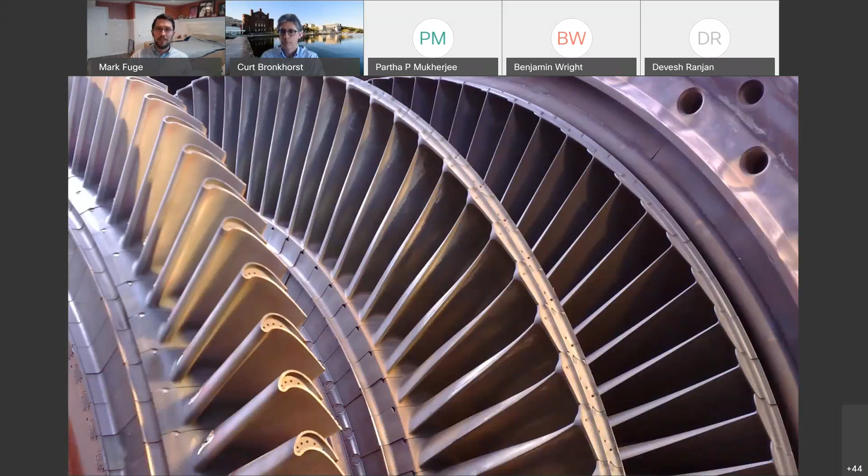I really like turbine blades because I think they represent, in such a small piece of equipment, so many of the complexities we see across mechanical engineering, from pushing the boundaries of material science to vibrations to manufacturing to aerodynamics. They're really a wonderful example.

I'm going to take an even simpler example than this, just the 2D cross-section and just the aerodynamic portion of it. But I'm hoping that from this simple example you won't focus so much on the specific application, but rather on the broader implications these ideas of learned representations would have for your field. Whether you work in turbine design or robotics or medical devices, the things we're going to talk about apply to all of those cases.

Specifically, here's how I want to spend the next 15 minutes or so. First, what are these ideas of design manifolds? That's specific to the work I do, but it's about data-driven learned mathematical representations. Why are they useful? Why go to the trouble of learning the skills necessary to study these things? And then, where do you go from here? If I do convince you these are important tools to add to your toolbox, what could you do?

So when I talk about a design manifold, what do I mean? Let's go back to that simple turbine blade example, even simpler than the full 3D one with all its complexities. Let's just look at a 2D cross-section, something that might look like this airfoil. I think an important question we often take for granted is, well, what actually is an airfoil and how do I represent it?

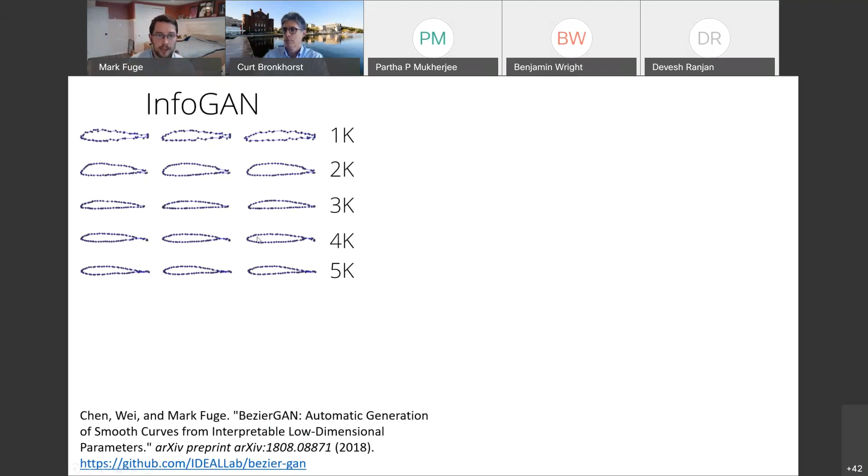In our case, what we did was take this standard model and the only modification we made was to add a small Bezier layer — just another layer in one of these neural networks. I won't go into the specific details due to time, but it captures things like curvature continuity and curvature control, which matter to people who study aerodynamic shapes.

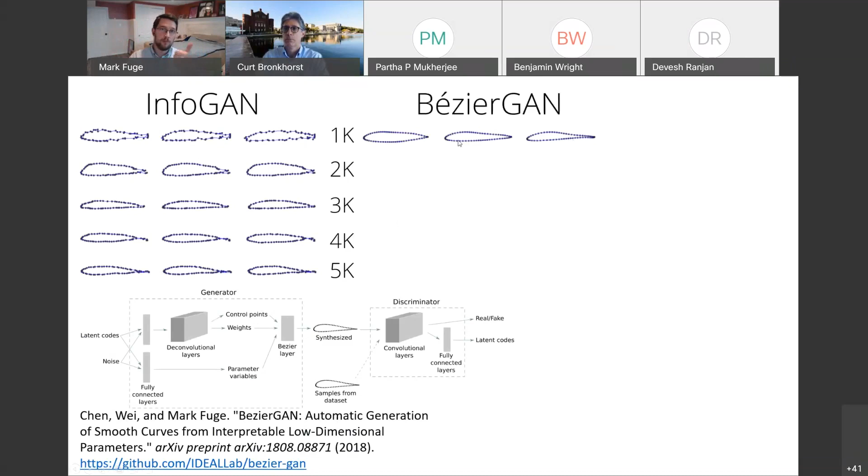By marrying our geometric knowledge of the engineering domain with these data science techniques, we can generate valid, curvature-continuous shapes, and also learn using far fewer training cycles than the associated computer vision system. So combining these two means taking examples of your engineering domain knowledge and applying them with the best of what computer science has to offer to find a happy medium. I think there's a lot of low-hanging fruit here for those of you in other mechanical science domains.

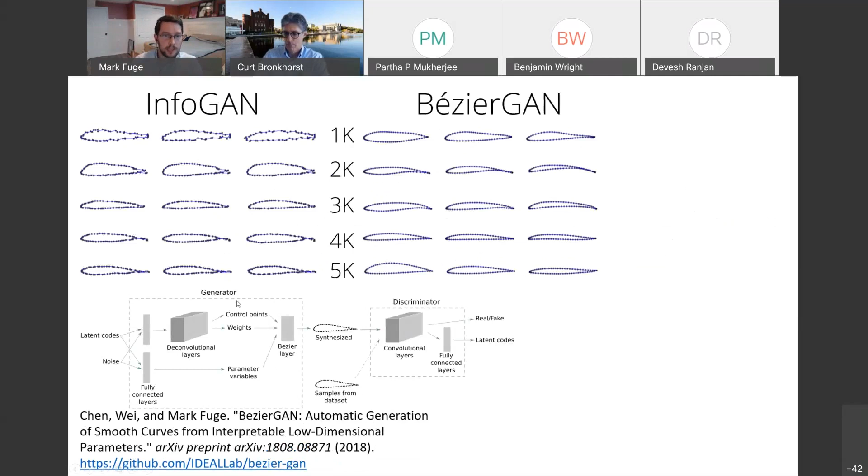Another example is multi-part components. One tricky thing about engineering systems is that it's not just a single image — there might be multiple shapes that need to intersect together. For example, in this simplified 2D case, I might have a shape and two conduits that need to pass through each other, with part dependencies depending on how they're manufactured or assembled. It turns out your engineering knowledge of the overall system architecture — how geometric parts should go together — can create a strong inductive bias for these machine learning models.

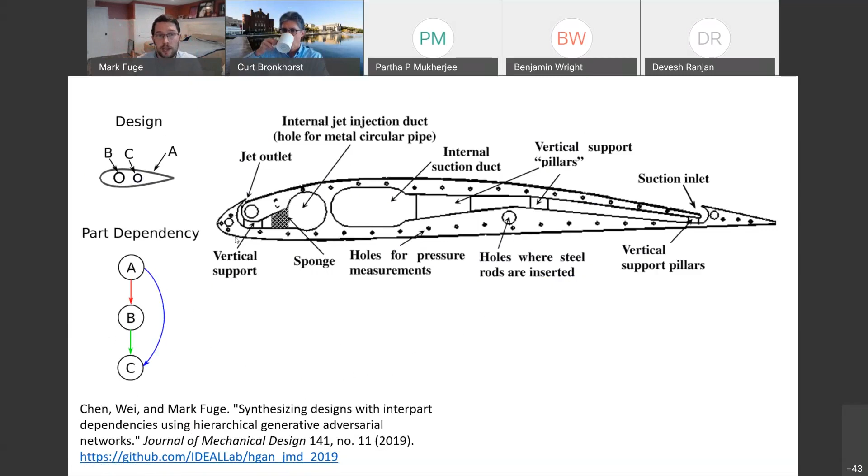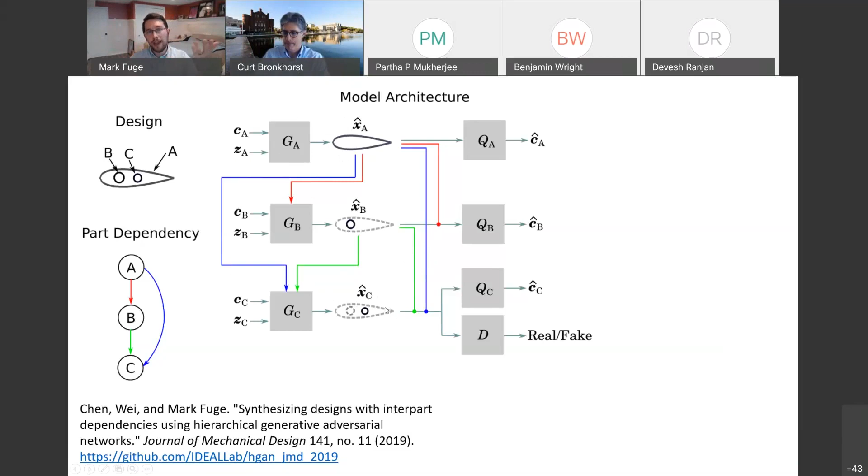In this particular case, we create separate learned representations for both the outer airfoil and all the internal components, wiring the neural architectures together and training them concurrently with some specific tricks we developed in the paper. The high-level result is that rather than treating this as a giant image to generate, you can learn conditional dependencies that model things like part containment.

For example, the algorithm learns a representation in which interior parts are always inside the exterior parts, even though we never explicitly told it that geometric containment was the goal. You'll also notice there's a topological hole in the space — because we didn't encode the topology correctly in this last layer, the model isn't able to capture this fact. So there's clearly additional work you can do if you know things about the topology of spaces that standard methods can't capture.

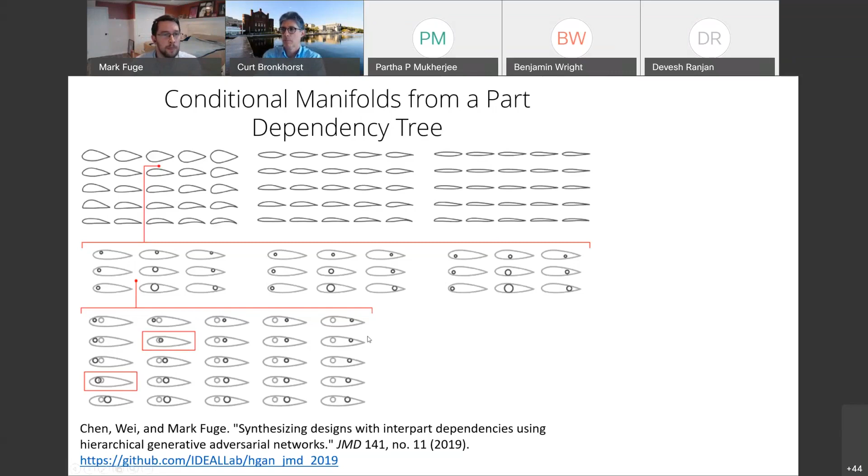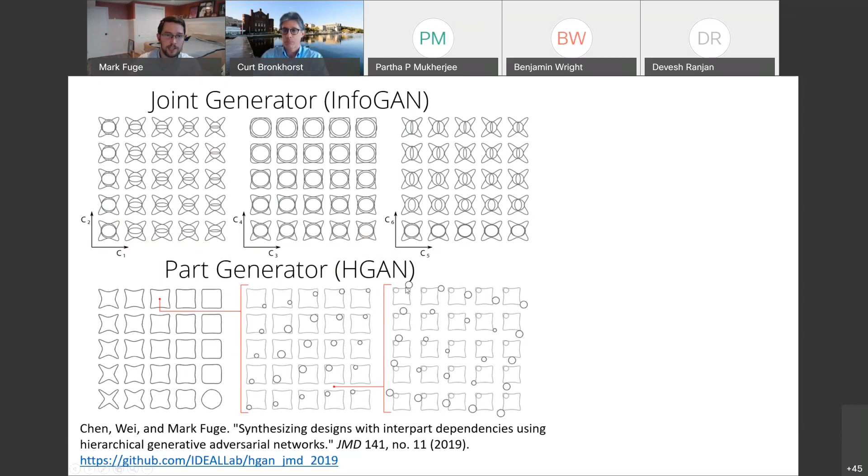However, if we model these in a hierarchical structure — in this case with parts that were internally tangent and externally tangent to the shape — it actually learns, without us telling it, that a polar coordinates representation is reasonable for parts with internal tangent constraints. Again, not something we told it explicitly. All we told it was that there's some kind of hierarchical relationship, and it uncovers that polar coordinates is a reasonable representation even though we never mentioned tangent constraints. So it's quite powerful to take fairly simple inductive biases from your engineering domain knowledge and encode them as modifications that would otherwise fail if used out of the box.

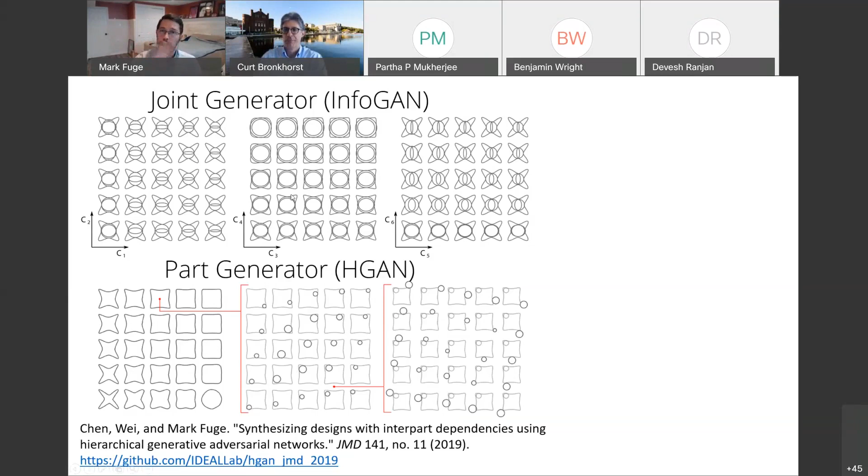So that's what design manifolds are. Why are they useful? Well, randomly sampling in this case, this Bézier GAN, but a learned representation space just makes sense. That's the technical term I'm going to use here.

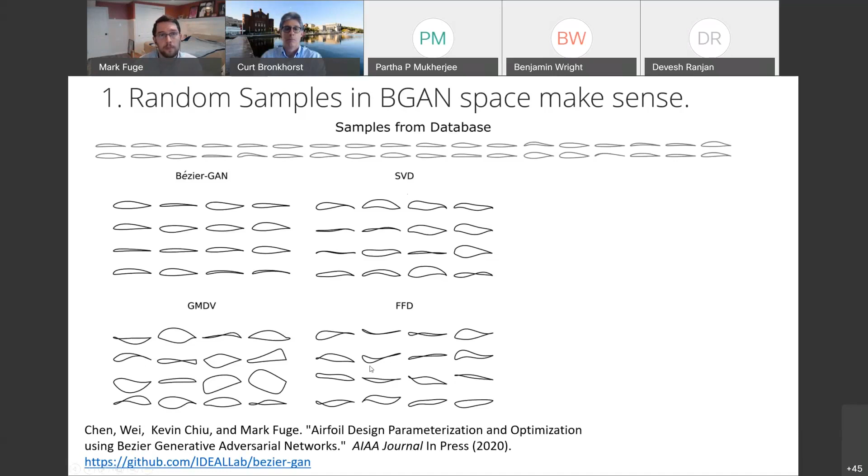It also covers the data distribution better. This is not surprising since it's specifically optimized to do this. But what's interesting about this is that when you do take random samples in human design coordinates like FFD or modal variables, it'll often produce degenerate shapes that won't even solve.

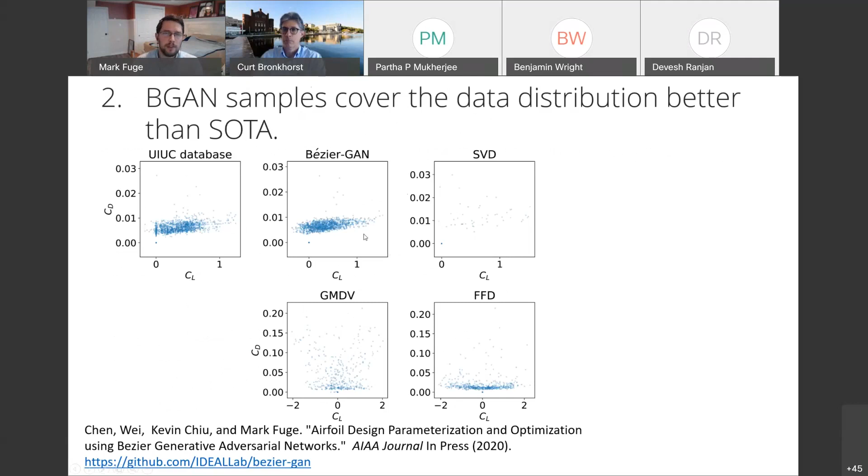And in this particular case, we're looking at generating samples of different lift and drag. So it covers those samples much better. But those are mostly just parlor tricks. The real benefit to this is when you try and use it for optimization.

So what I'm going to show you now is on the x-axis is basically number of CFD runs. This could be a week long if you're doing a really, really expensive large eddy simulation. And this is trying to find the optimal lift-over-drag for a given Mach number or Reynolds number.

And if you look at this using traditional representations—you boot up your CAD system right now and try and design one of these things—you see curves that look kind of like this. If it's a NURBS, which is a B-spline, depending on which optimizer algorithm you use, you get this kind of performance.

And if you just use something like principal component analysis, which is again this linear subspace, what you can see is that initially it makes faster progress because the number of dimensions it has to optimize is much smaller, and then eventually plateaus because all of the good airfoils that you actually want are off manifold—they're off this linear subspace. So this is kind of the classic phenomenon you'd expect as you start to decrease dimensions.

Once you go nonlinear, however, you can get the same kind of cost reductions in terms of optimization that you would get from a reduced dimension, but still faithfully capture these higher-performing airfoils. So in this case, we're able to achieve about a 10x reduction in the amount of CFD runs you have to do to get basically equivalent performance no matter where you go.

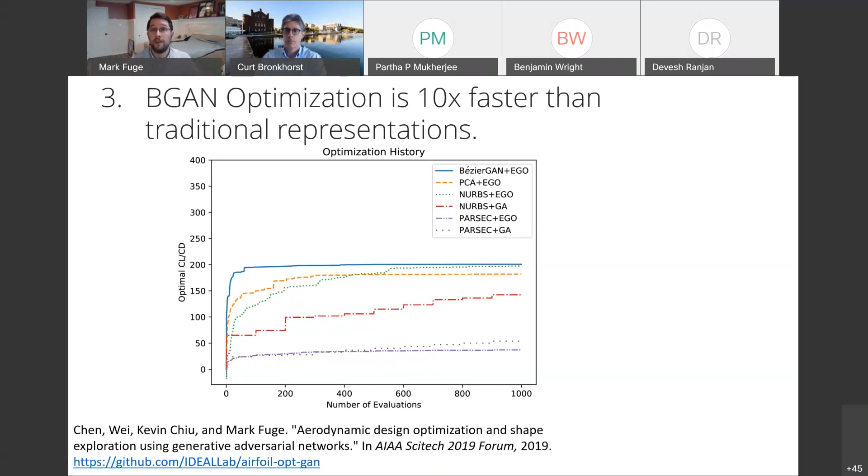So this is the sort of punchline for why learned representations are good. They make downstream tasks like uncertainty quantification or optimization much faster. We see the same thing even with state-of-the-art representations.

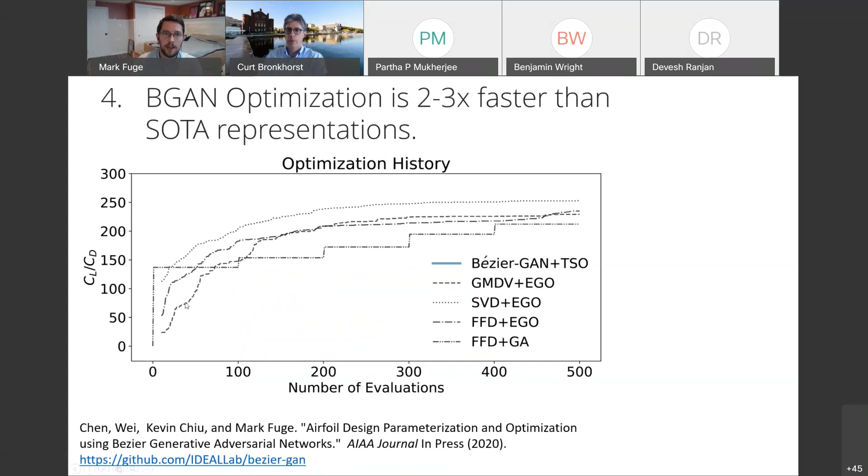So not stuff from 20 years ago, stuff that was published in the past 2 years—you still see, for freeform deformation, modal variables, SVD, which is a type of principal component analysis, accelerating the optimization, and then again with these nonlinear dimension reductions, achieving even faster performance than those, about 2 to 3x. So this is really the key punchline for why you would care about things like learned representations.

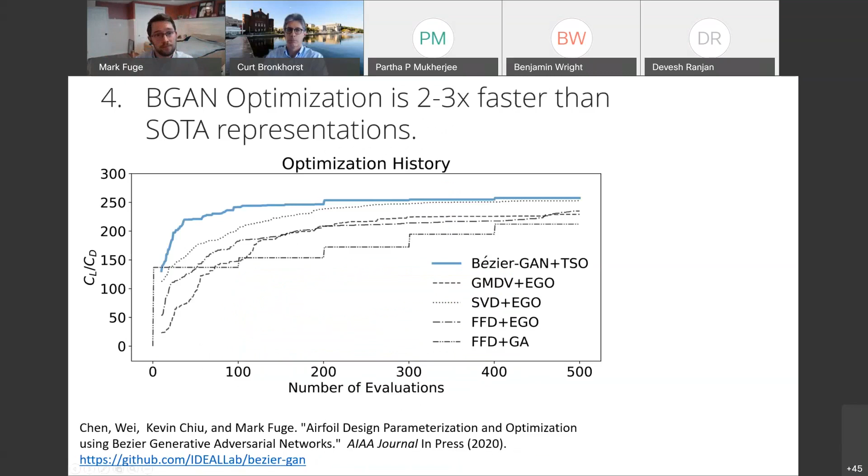Okay, so if I've convinced you that these things are interesting, where can you go from here? One of the questions I always get when we talk about data-driven representations is, well, what actual data do I need and how much of it do I need?

And what's interesting about the work that I showed you here is that we didn't learn these data-driven manifolds from airfoils that were specifically optimized or in any way targeted for the specific Mach number or Reynolds number we were optimizing for. We just used reasonable examples that prior engineers had thought of for different kinds of boundary conditions. But it turns out even those designs that were not optimized for that case still provided a reasonable learned representation that outperformed current state-of-the-art representations like freeform deformation or modal variables.

This should not be possible, or at least it didn't make sense to me the first time we saw it. But really, as long as you have some subset of designs that reasonably captures major variations in the space, these learned representations can still be useful. Likewise, if you do have any invariants that you can use to augment it, like we did here with the geometric constraints, those can help.

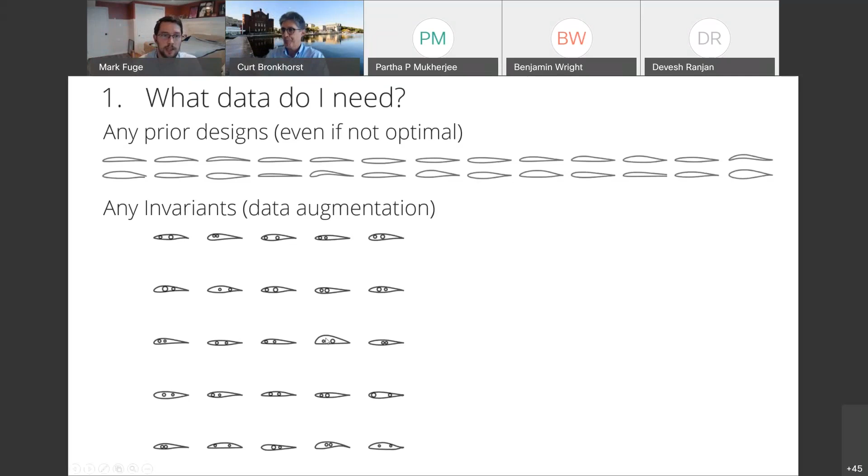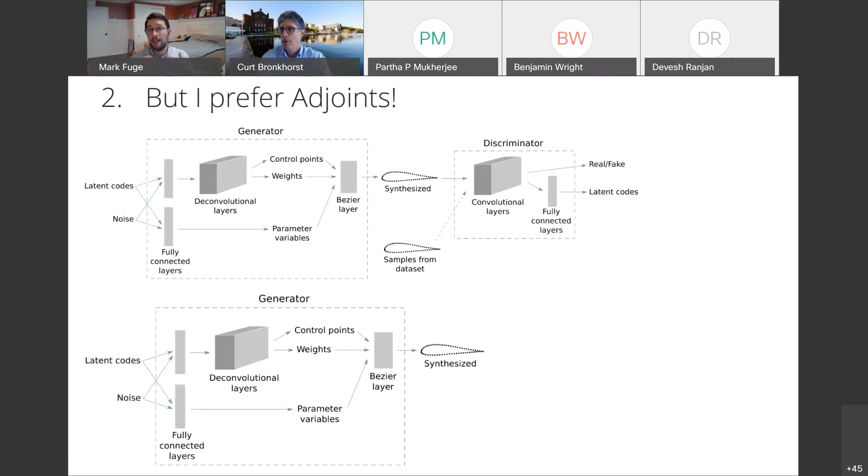If you are the type of person who doesn't necessarily want to do airfoil synthesis, but you care about things like uncertainty quantification or doing gradient-based optimization using adjoints, you can actually cut and paste various portions of these. For example, the generator we use to generate these airfoils is fully differentiable, so it's completely compatible with any kind of uncertainty quantification or adjoint optimization approaches. You don't necessarily have to pick and choose your approaches.

What if innovative examples actually come off the manifold? In other words, they're actually off the subspaces that we learned. Well, it turns out that these are still reasonably good ideas. Learning this manifold is still a reasonably good idea in two ways.

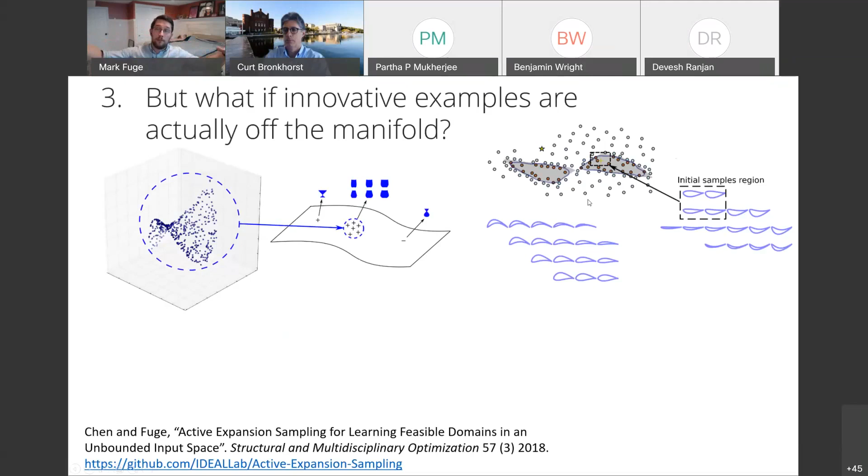The first is that you can use this as a base to explore what I would call across the manifold. So there might be a set of designs that you can use to explore outward and find other designs. In this particular case, we started with a small set of samples and invented an algorithm that explores around on the manifold to find new and novel designs that you hadn't thought of before. We had to invent this idea called active expansion sampling to do that, which I'm not going to go into, but if you're interested, you could take a look at our paper on this.

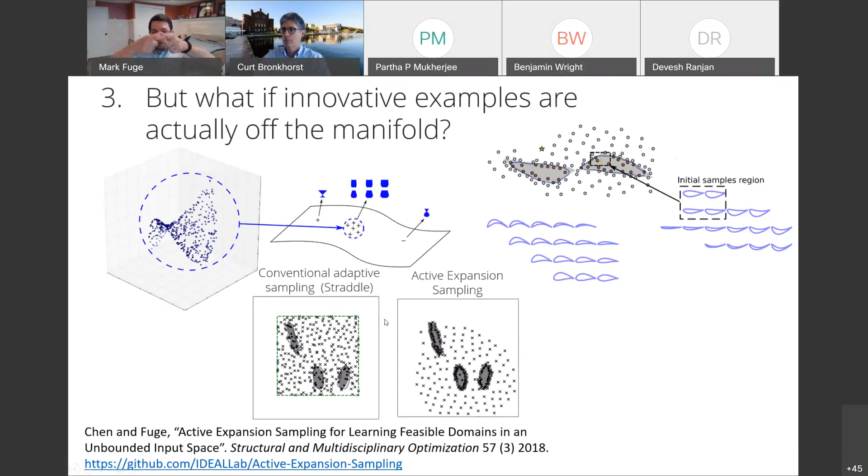In addition to exploring across the manifold, you can also explore off manifold. In this particular case, we can optimize an airfoil until we've achieved the best possible performance, and then go back to the 100-dimensional representation where those minor variations around something that's locally optimal in the manifold could still improve performance. So it's even a good way of warm starting techniques that have nothing to do with finding these low-dimensional learned representations. It can still accelerate that quite significantly.

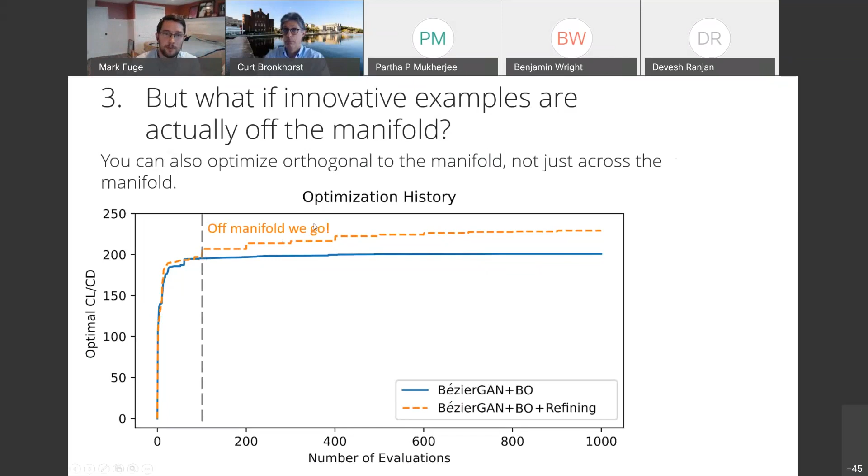Okay, so off manifold we go, and then you can go and do regular kinds of optimization from there that don't include any of this data-driven manifold work.

When shouldn't you use this? Well, if you don't have any reasonable prior designs, like you've never worked in a domain before, then there's not really going to be any prior basis to learn these. So that's not a place where doing any kind of data-driven modeling would make sense, including the work I'm talking about here. Likewise, if you can't bootstrap this with simulation, for example, trying a bunch of simulated designs and then down selecting to a subset that work, or known invariants, then this also wouldn't work. In those two situations, I would recommend doing something like active subspaces, where you can compute things like gradients. So how could you get started?

Well, if you'd like, you can go to our GitHub. All of the examples I've shown here and many others from other papers are available for you to try on your own data, as well as the papers that we have published.

But I want to return to my overall point that I wanted you to take from today, which is that how you represent whatever phenomenon it is you're studying matters. In my case, it might be airfoil optimization. For other people, it might be uncertainty quantification of a material system. And the way that you mathematically represent that is a non-trivial choice. It could have drastic consequences on how quickly you could do things like optimization, or even if you can do something like uncertainty quantification for your system.

What I've tried to convince you of today is that in addition to thinking through things like group theory or other types of symmetries in the physics and mathematics of the problem, there's advantages to be gained by thinking through how to leverage past data to help infer better representations. And I've tried to convince you that this is possible, that it's powerful. It can achieve, in this case, about a 10x reduction compared to current representations, or a 3x reduction compared to existing state-of-the-art.

And also that they're a necessary component if you're going to be able to educate researchers in how to combine the best of what computer science and machine learning and the data sciences have to offer with the best that we have to offer. And so my take-home message, if your goal is to tackle these pressing important societal problems like efficiency and climate change.

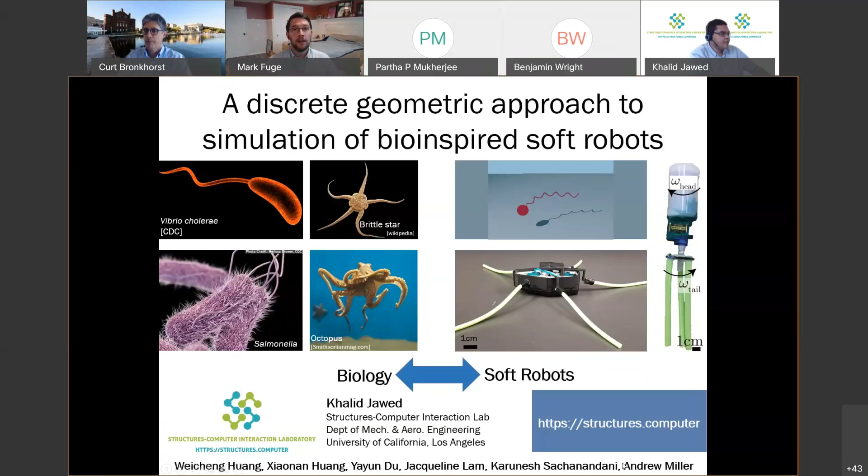So let's begin. Today, I will first go over fast physics-based simulation tools that are inspired by computer graphics, tools that can run at interactive rates. And then I will use these simulation tools to learn about the application of deformation and instability in the design of bioinspired robots, as well as the physics of the organisms.

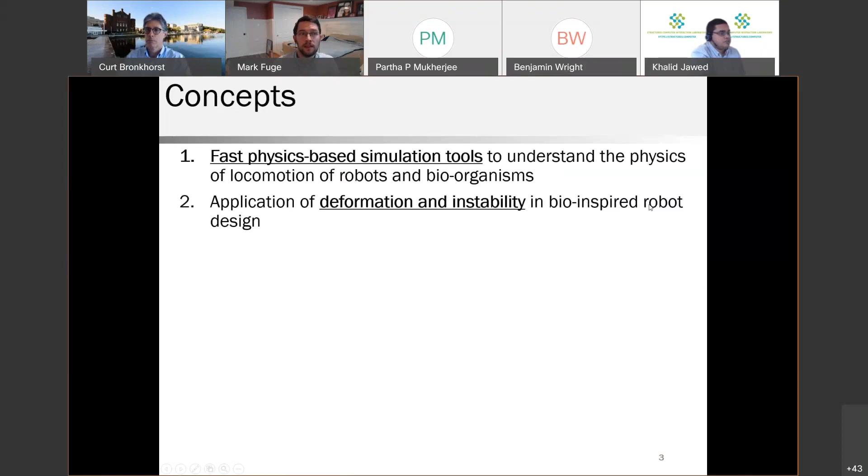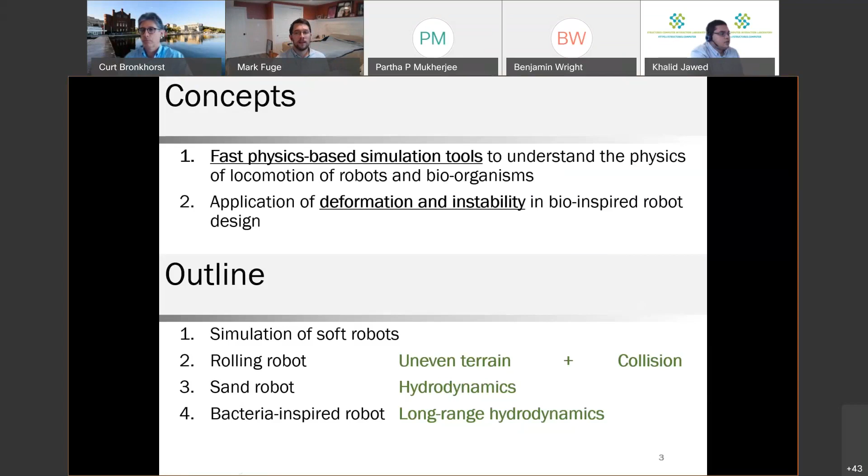So first, I will begin with simulation techniques for soft robots. Then I will go over an example with a rolling robot, where we will encounter challenges such as uneven terrain and collision. Then very briefly, I will use the same simulation tool to study two more robots, both of which will include fluid structure interaction. So at the end of the day, I hope that I will have introduced a simulation tool that can simulate large deformation of soft robots and incorporate things like hydrodynamics, collision, and so on.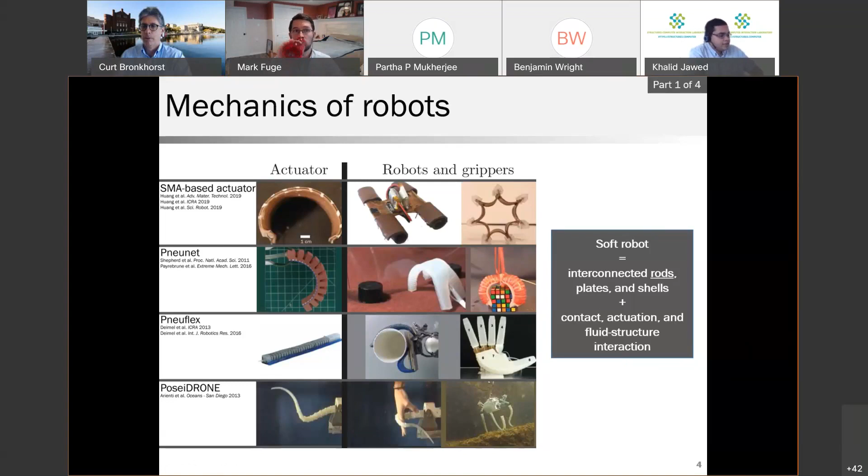An overwhelming majority of soft robots can be modeled as a collection of rods, plates, and shells. You can have rigid bodies as well. This whole system will encounter things like contact, actuation, and fluid structure interaction. So the framework I will present today is not applicable to every single robot out there. However, for robots that are slender, that look like a plate, shell, or rod, I hope the simulation tool will be useful.

Let's start from the fundamentals. Let's think of a mass spring system. If I want to simulate a mass spring system in an undergraduate dynamics class, all I have to do is solve this equation that F equals ma. So mass times acceleration is equal to elastic force and the external force.

The elastic force can be obtained from the negative gradient of the elastic energy. In case of a spring, I'm calling this elastic energy, or I could have called it spring energy as well. It's simply 1/2 kx squared.

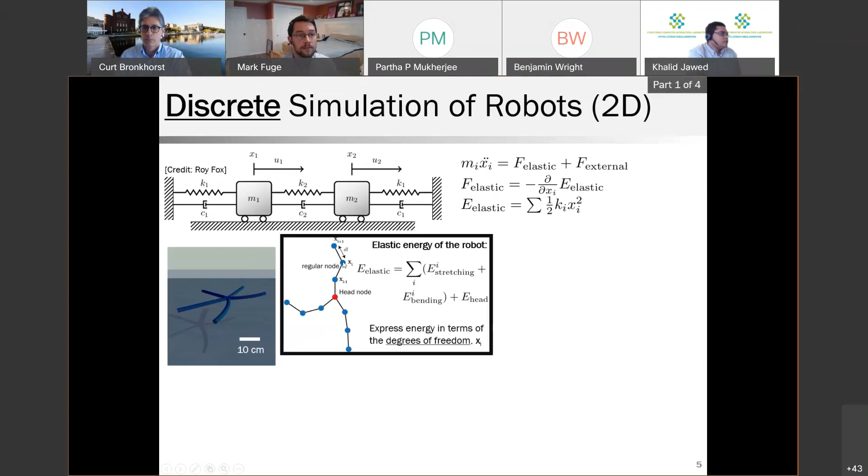Now I can use a similar approach, a mass spring based representation, to simulate a robot that looks like an octopus. Let's say this is a representation of the robot. Then the total energy is the sum of stretching and bending energy plus some energy at the head. Stretching energy is just like a spring between two nodes.

I'm not going into the mathematical details of this. The bending energy is related to the turning angle at a node. So if I have 3 nodes here, there is a turning angle. I can calculate curvature binormal from this turn, and then the bending energy is simply 1/2 EI, where EI is the moment of inertia times Young's modulus. So this whole thing is bending modulus times curvature squared.

Now at the head, we have to do a special treatment. The energy at the head is simply the sum of 3 bending energies, since I have 3 angles at the head. So the head energy is equal to the sum of 3 discrete bending energies.

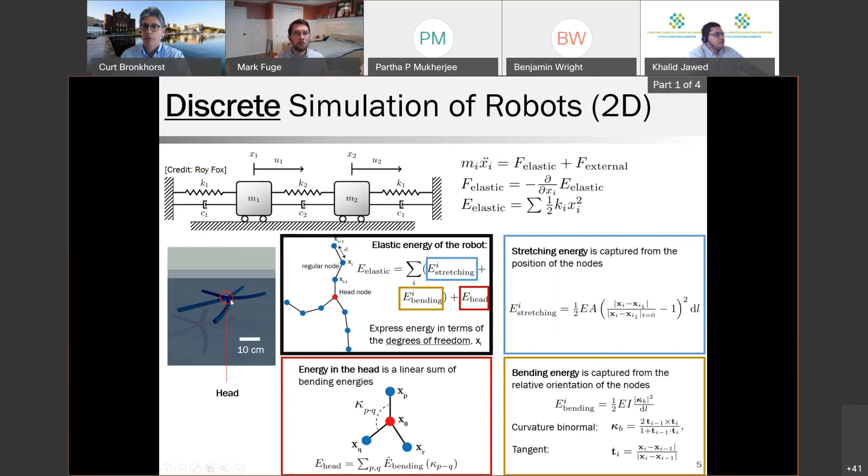Once I have all the energies, I can simply solve an equation like this in 2 dimensions. This was an example in 1 dimension, then an example in 2 dimensions. Now let's move on to 3 dimensions. Instead of calling it a beam, we are going to call it a rod.

For this, we go back to Kirchhoff, who represented the energy as a sum of stretching, bending, and twisting energy. So the main difference between a beam and a rod is this existence of twisting.

We will be building up on a simulation tool called discrete elastic rods. This simulation tool has been used by the computer graphics community since 2008. It has been used in movies like The Hobbit, Lord of the Rings, and so on. It was also imported to study various systems like coiling of rods, bacteria, CNTs, and so on in mechanical engineering.

Generally speaking, oftentimes in computer graphics, physical accuracy is neglected. However, in engineering, we cannot really neglect physical accuracy. We have to match experiments and simulations. So in this case, we are careful enough and have analyzed it enough to make sure that this actually represents the physical systems. Some of these papers will include comparison with experiments as well.

In case of a 3D rod, instead of just the nodes, I will also need the twist. To measure the twist, I can use the angle between a reference frame, which is the white and black frame here, and the material frame, which is the blue and red frame here. But in discrete settings, instead of using the continuous rod, I will use a discrete rod and formulate a twisting energy at each node by an expression that looks like this.

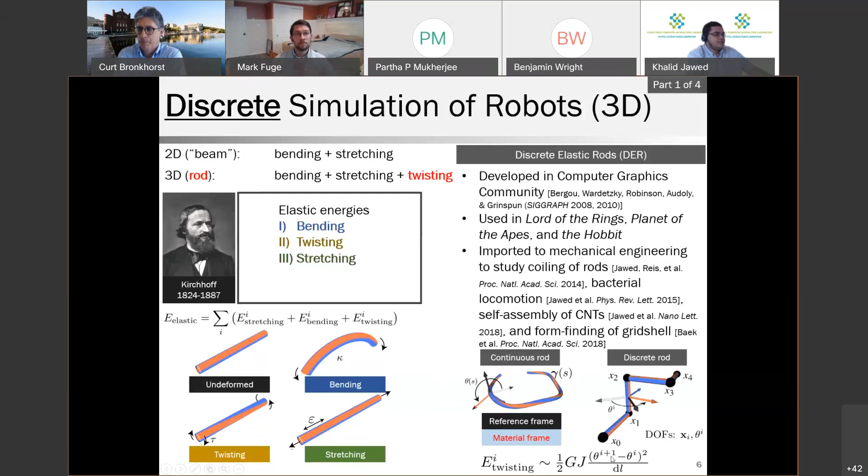So twisting energy is proportional to GJ, which is the twisting stiffness. G is the shear modulus and J is the polar moment of inertia, times the difference between twist angles squared. So this is essentially like a spring, a torsional spring.

Generally speaking, when we convert a system into a mass spring system, we oversimplify the problem. But this is where discrete differential geometry comes in: it's a method of describing a continuous system through its discrete analog without oversimplification.

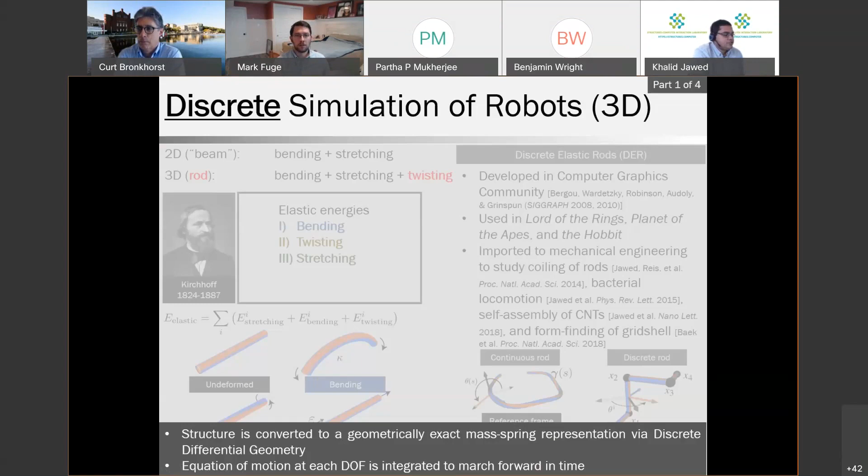Sometimes it is called the geometrically exact mass spring representation. So once I have the energy, I can use a spring-damper-like equation of motion to go forward in time step. Let's elaborate on that through an actual robot.

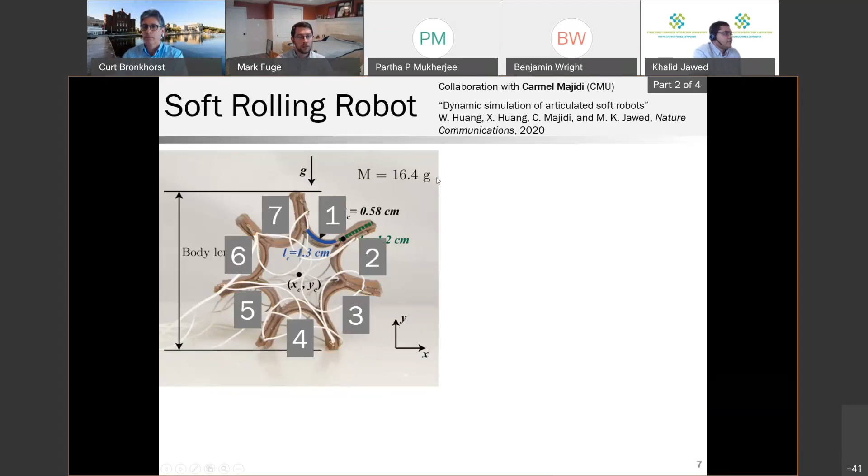This robot was built at Carnegie Mellon University, and a paper recently got published. We use this robot because its locomotion is in 2D, so it's a good first test for our numerical simulations. It's about a few centimeters in size, fairly light, and made up of 7 actuators, where n equals 7.

Let's focus on each actuator. I won't go into the details since we have several publications on this, but briefly: there is an SMA wire embedded in polymeric material, and when the SMA wire is heated, the actuator changes shape. This is the natural shape of a single actuator, and this is the heated or actuated shape.

To make it quantitative, let's plot the relative Young's modulus on the y-axis as a function of time, shown as the red line. Electricity is passed through the SMA wire for about 0.1 to 0.3 seconds. The Young's modulus is normalized so it starts at 1, shoots up to between 2.5 and 3, then cools down and returns to 1 after about 3 seconds.

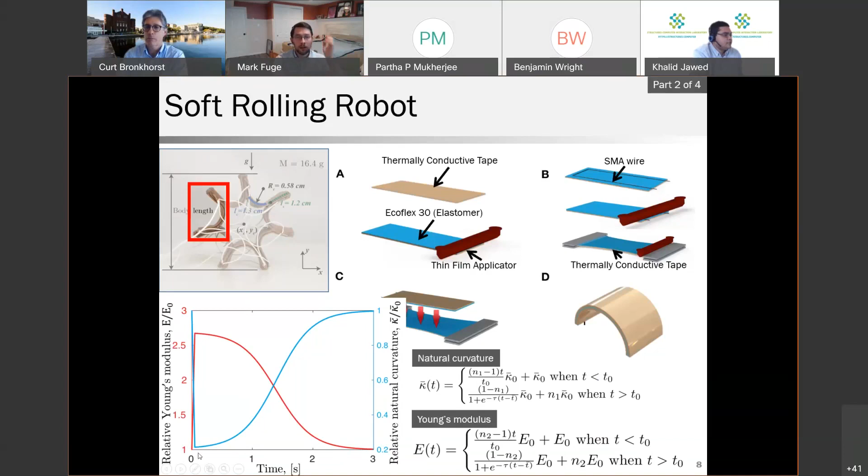Similarly, I'm plotting natural curvature as a function of time, normalized to start at 1. When electricity passes through, it drops from 1 to about 0.2 and slowly recovers back to 1. To fit these functions, we used this type of expression.

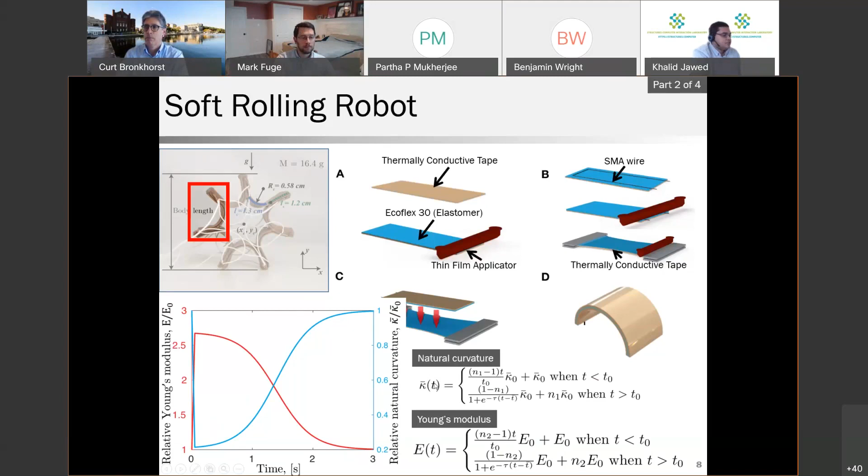Going forward, we can think about more complicated shapes and use neural networks, data, and machine learning techniques to represent some of these functions. So I have the Young's modulus varying as a function of time, and the natural curvature as a function of time. We will implement that in the simulation.

Let's look at the real robot first. This is how it moves around. The robot has not been sped up - typically soft robots are small but slow, but this robot is actually fairly fast.

Now, how can we simulate this system? This robot is in 2D, so I can divide this structure into n nodes, giving 2n degrees of freedom. For each degree of freedom, I have an equation of motion: mass times acceleration equals elastic force plus external force plus gravity. I discretize this equation and go forward in time step, though I won't talk about the details of the time stepping.

While solving these equations of motion, we use Newton-Raphson's method, and during that method we need the gradient of these terms. The most critical part is the so-called Hessian of the elastic energy. The elastic force is the gradient of the elastic energy, and if I take another gradient, I get the Hessian of the elastic energy.

Now, this Jacobian matrix is banded. So when going forward in time using the Newton-Raphson method, if the Jacobian is banded, the time complexity of this algorithm is order of n. That's one of the key parts behind the computational speed of this type of algorithm.

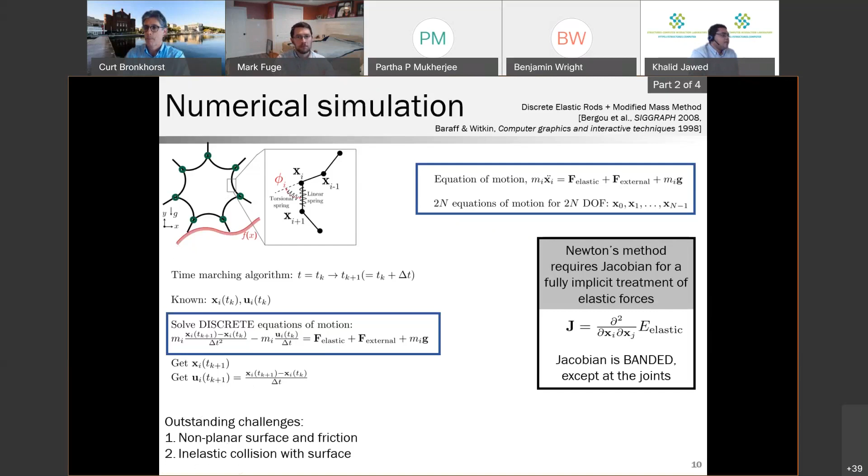So I will talk about how we go about solving those two challenges. Let us rewrite the equation of motion slightly differently, simply dividing the left-hand side and right-hand side by the mass of the lumped mass at each node, mi. So acceleration equals 1 over mi times the forces.

If I want to fully constrain a node, I can replace this so-called inverse mass matrix by zeros. What that means is a node with infinite mass that cannot move. So this will fully constrain the node.

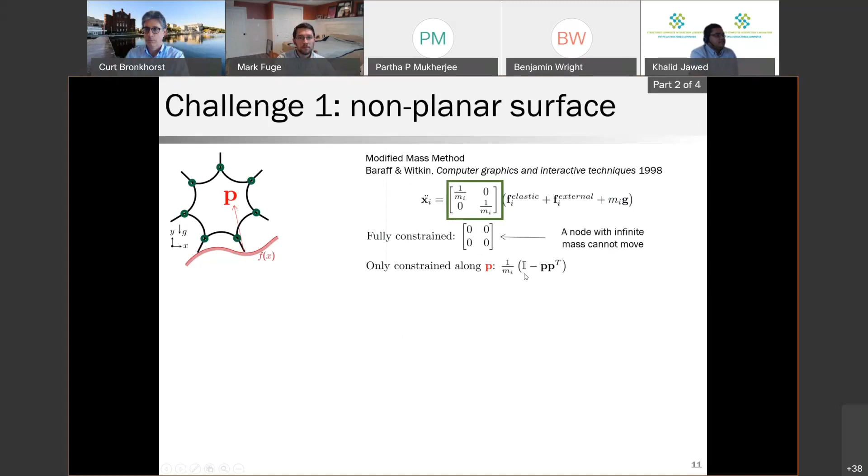If I only want to constrain this node that is touching the ground along this vector p, there's a method called the modified mass method from 1998 that says I can simply use an inverse mass matrix that looks like this.

In addition to constraining it, I will have to account for the reaction forces as well, and that will have to include friction.

So there are three rules of contact. There cannot be penetration, so the robot cannot fall down. The reaction force always has to be positive, so the ground will always be pushing the robot up.

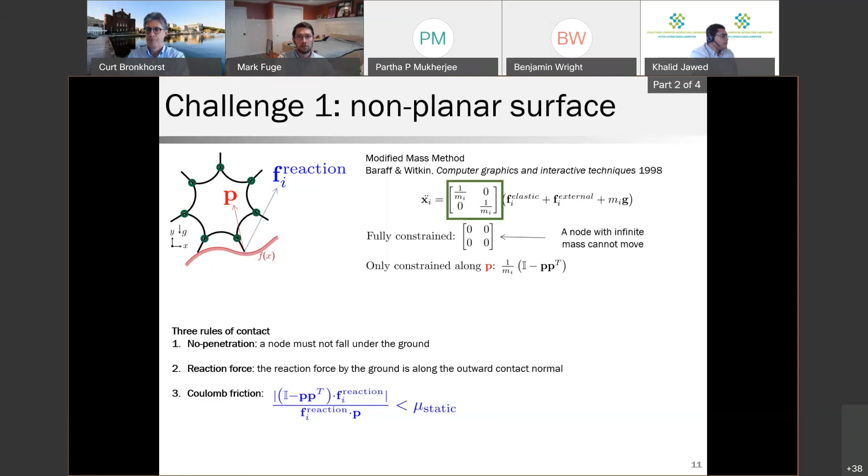There's also the well-known Coulomb's friction law: the ratio of two components of the reaction forces will have to be less than mu static, the static coefficient of friction. If it is higher than that, the robot will begin to slide.

I encourage you, if interested, to go back to the paper and read the details. But the idea is that an arbitrary non-planar surface can be handled, in this case.

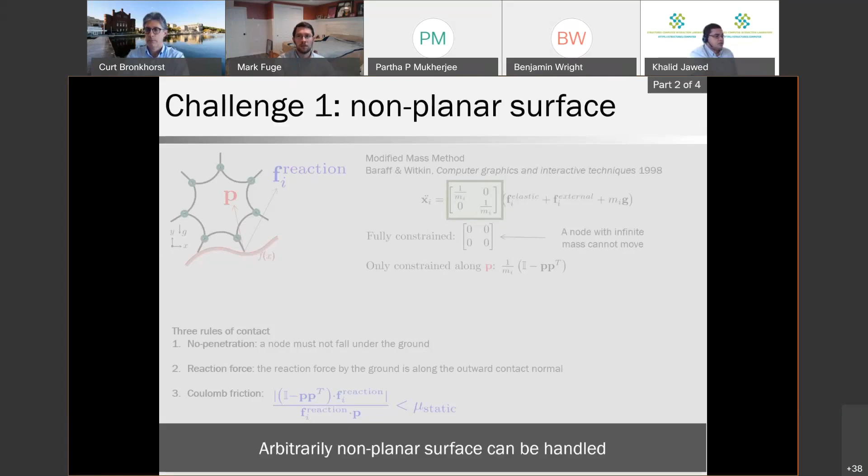Now let's talk about collision. Let's say I have a robot at this position, then we drop it. It will bounce back and forth for some time, and then it will slow down.

We use a damping matrix to recover this type of behavior. However, we are more familiar with viscous damping, where the damping is simply mass times velocity times some prefactor. But there is another type of damping, represented by the second term here.

This material damping is proportional to the tangent stiffness matrix times velocity. Qualitatively, this type of damping opposes rapid changes in deformation, whereas viscous damping opposes rapid changes in velocity—so if you're trying to move, it'll stop it.

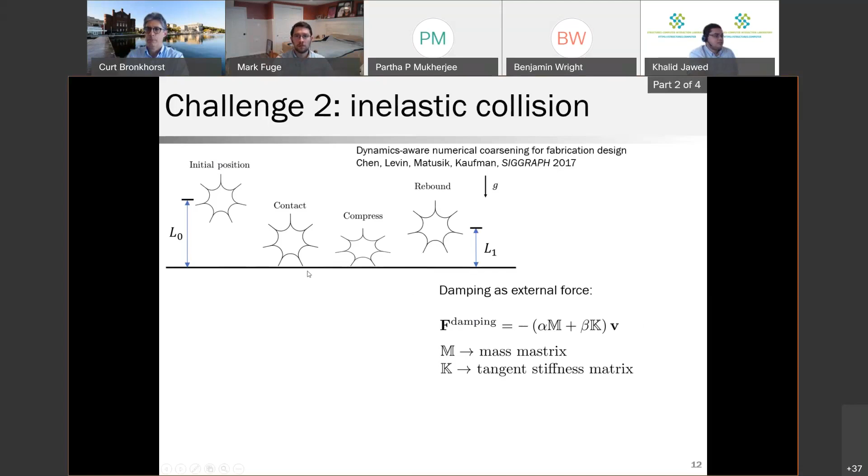Rapid changes in deformation can happen at the ground, and the amount of damping is a function of the robot material, the type of surface, and so on. We use data fitting in this setup and come up with a value where beta is 3e-3.

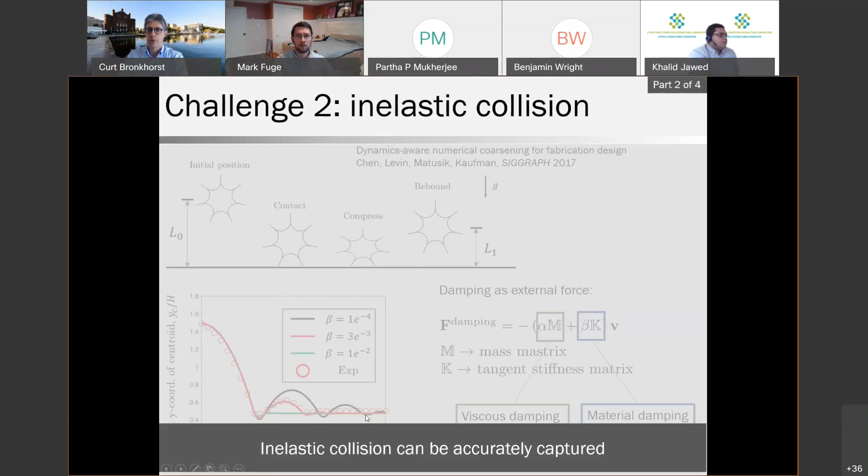In this method, we can also calculate the inelastic collision. So let's put together experiments and simulations and see what happens.

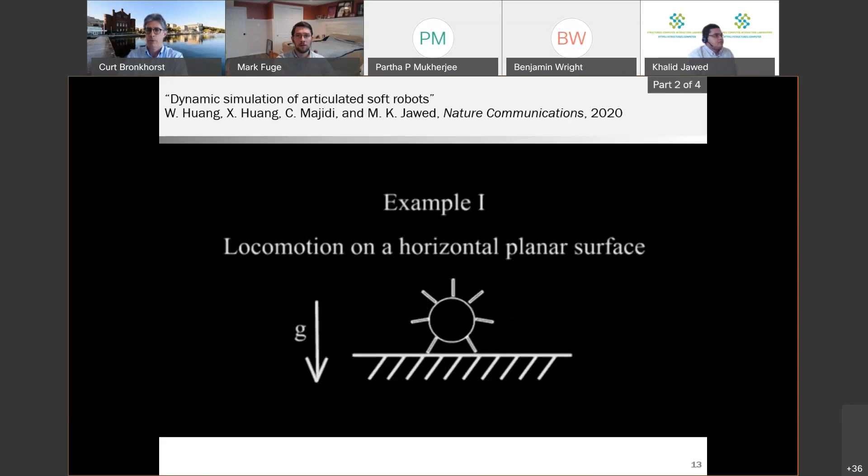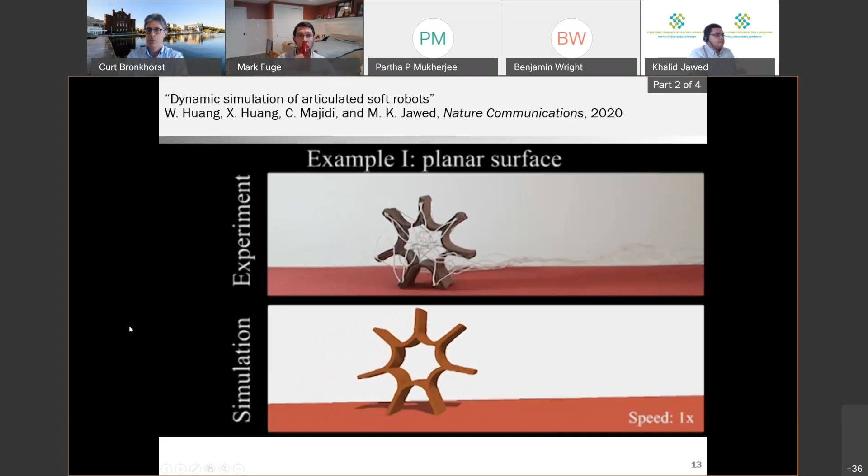First we will do simulation on a planar surface. The top is experiments and the bottom is simulations. It's a fairly straightforward case because it's a planar surface.

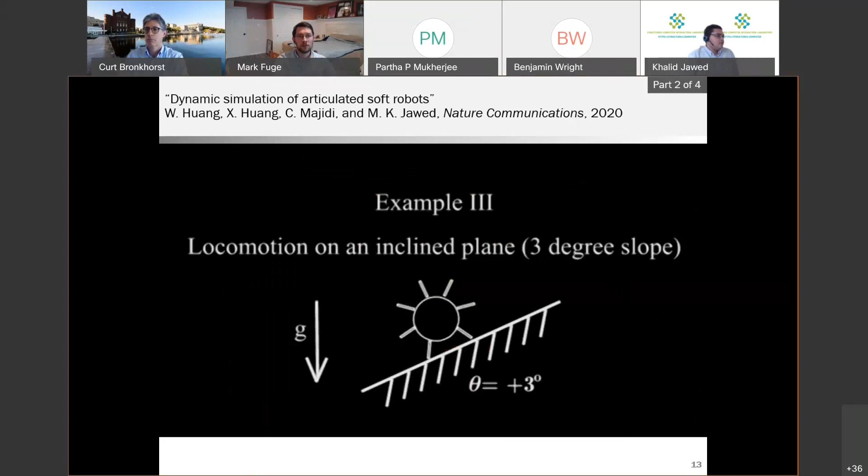Let's incline the plane with an angle of 3 degrees. It's only 3 degrees, so the motion is very similar to the case of planar locomotion. Now let's incline it plus 3 degrees.

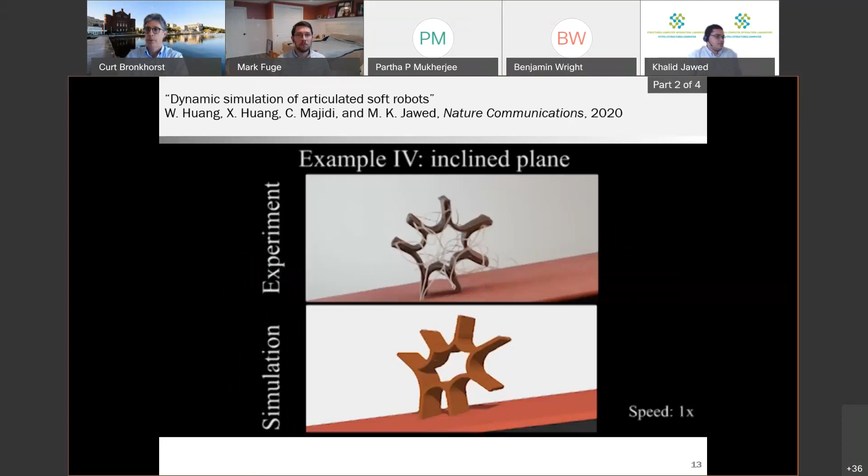Now what happens if I incline it even further? Then the robot cannot go forward anymore.

Now let's make it a sinusoidal surface, with the initial location of the robot at the minimum of the sine wave. It goes a couple steps and then gets stuck. Now let's start from the maximum of the sine wave.

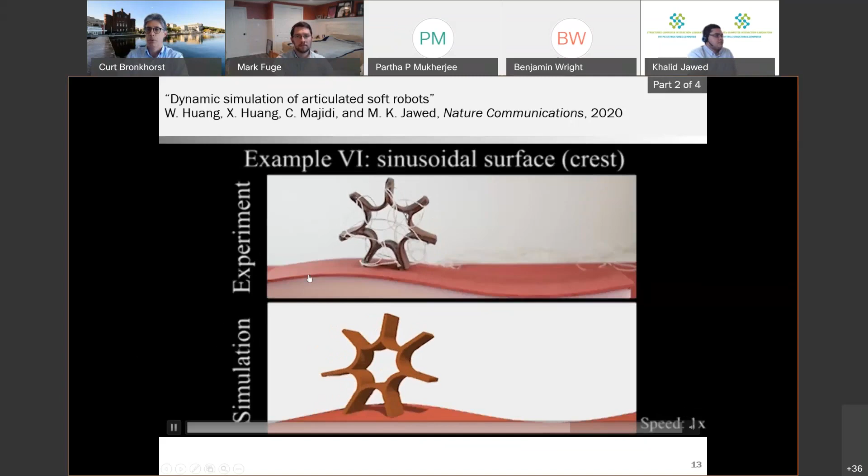Now let's look at the computational time. I'm plotting the computational time divided by the wall clock time, as a function of the time step size in the simulation. As I increase the time step size, the computation time goes down, and across this entire range the simulation can accurately represent the experiments. When this value is less than 1, the simulation is faster than real time. In our simulation we used about 100 to 150 nodes, and with that amount, the simulation can actually beat real time.

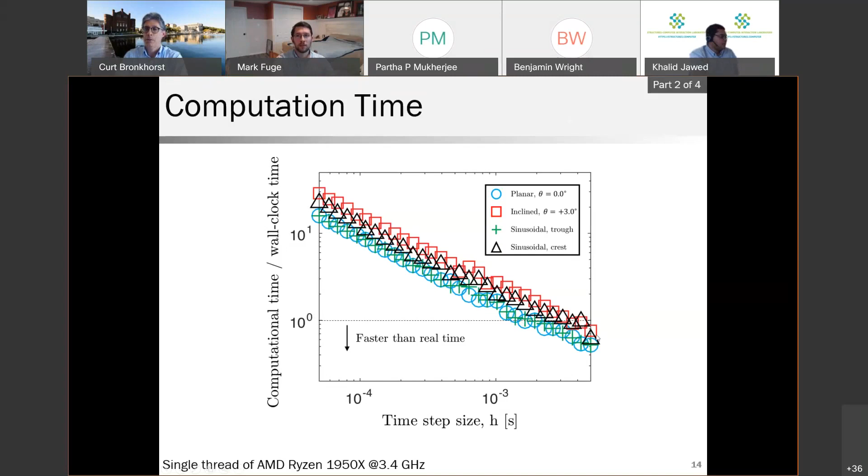Now I'm going to switch gears a little bit and move to the next part of the talk. So far we've talked about a simple robot in two dimensions. It has collision and contact, but everything is in 2D. There was not much influence of the ground, or rather, not much influence of the surrounding medium.

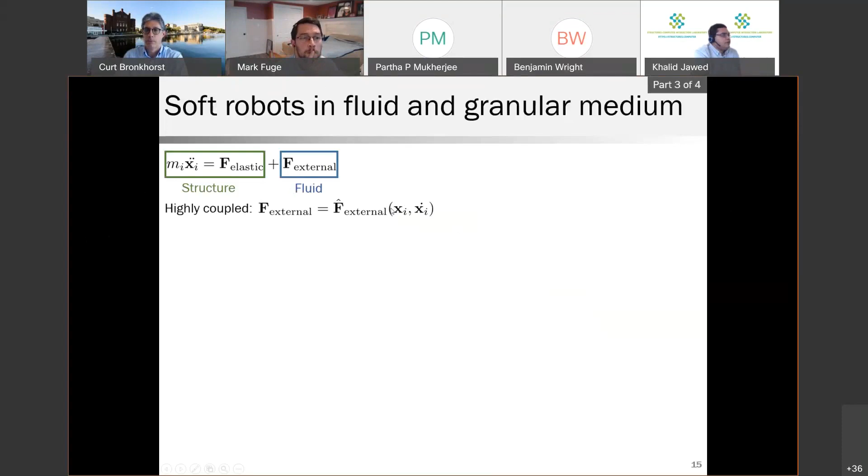But a key part in soft robotics is the coupling between structure and the surrounding medium. To elaborate on that, I'll talk about a very simple robot and incorporate fluid-structure interaction into the system. I start off with my equations of motion: I have the structure part and the external force, which is the fluid part. This is highly coupled, because the external force can depend on the location of the nodes as well as the velocity of the nodes.

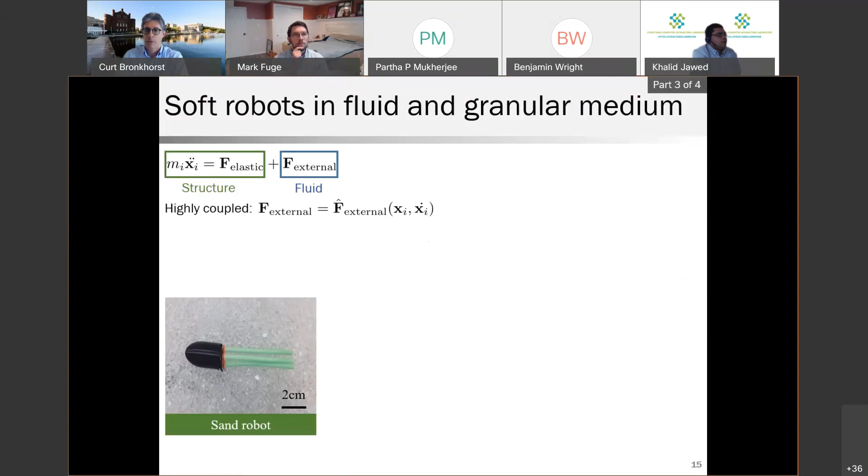So we built a simple granular robot for locomotion in sand, or rather granular medium. It has a head containing a battery and a gear motor. The tails are made of vinyl polysiloxane material, so they're soft and elastomeric. We use a granular medium that is transparent so we can observe the motion from outside.

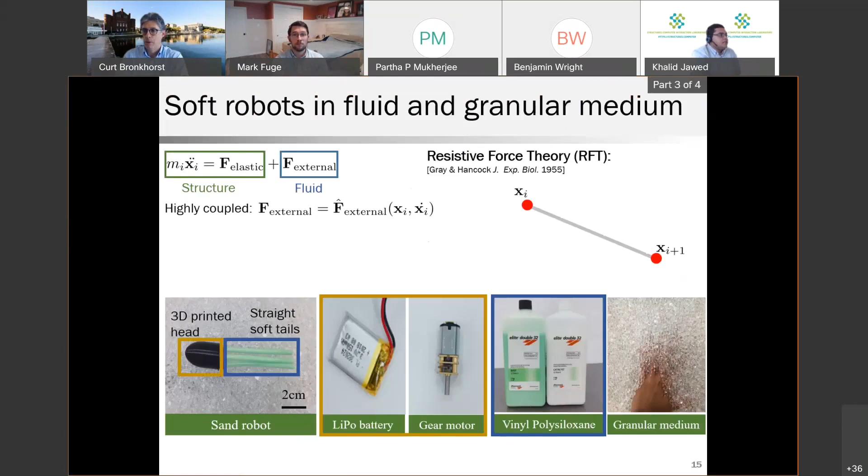To simulate the fluid, we use resistive force theory, which goes back to 1955, and it has been shown that such theories are often applicable to granular medium as well. However, RFT was initially developed for low Reynolds number fluids, like locomotion of bacteria.

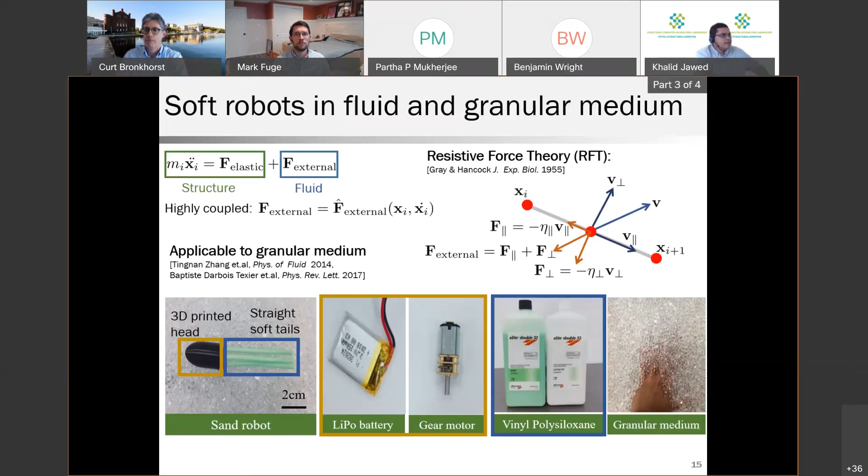Resistive force theory is actually fairly simple, and I won't go into the details. Every segment of the robot has a velocity, divided into two components: the tangential component and the perpendicular component. Opposing these are two forces. Along the perpendicular direction the viscous damping coefficient is eta perpendicular, and along the other direction is eta parallel. RFT says these two friction coefficients are different—roughly one is 2 times the other. Then I sum up these two forces to get my total external force.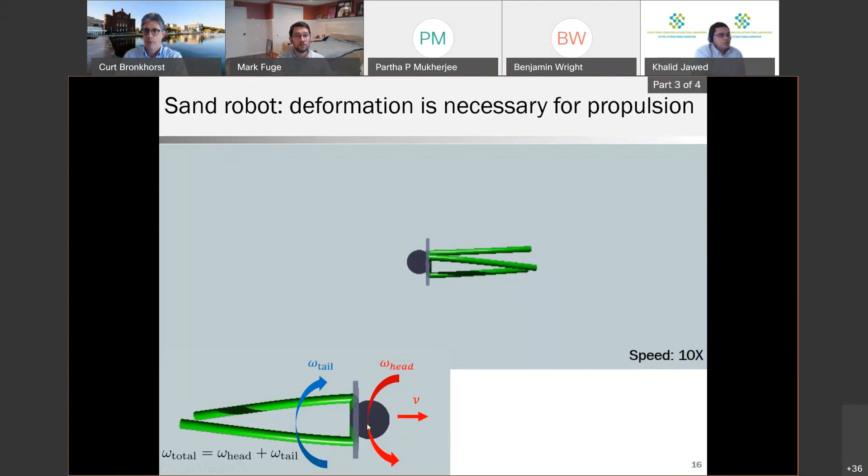Once we put that in simulation, this is how it looks: the robot is moving forward, the tail is rotating along one direction, the head is rotating along the other direction, and the sum of torques becomes 0. The total rotation speed is simply the speed of the head plus the speed of the tail—that's the rating of the motor.

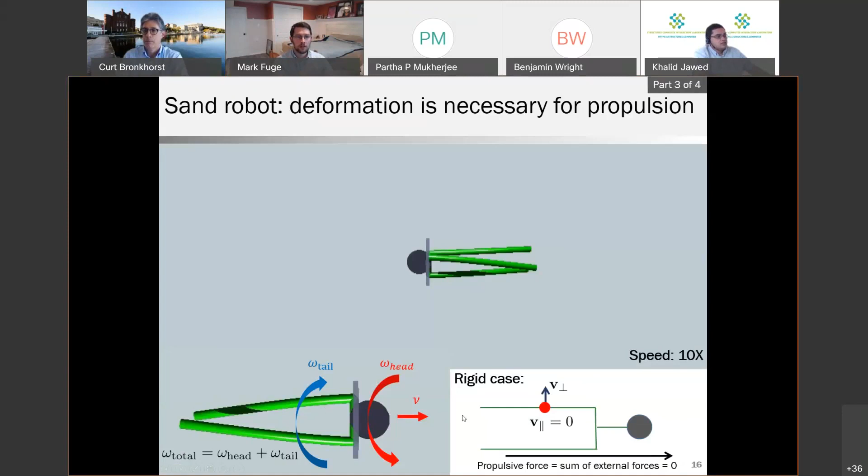Now, if we had a rigid robot, there would not be any parallel velocity component, and there would not be any external force along the tangential or axial direction. So the point is, deformation of the soft tails causes motion along the axis of this robot. This is the simulation, and this is the experiment showing this robot.

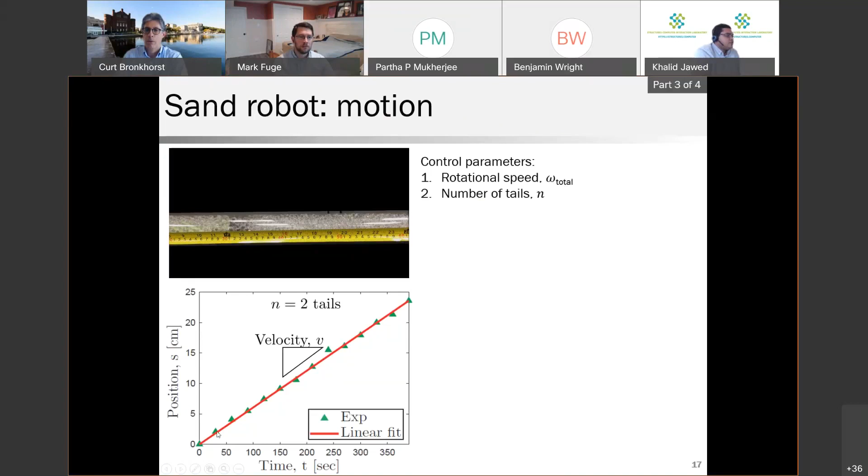Now, to quantify that, I'll use two control parameters: one is the speed of rotation, and the other is the number of tails. First I'm plotting position as a function of time, and it looks linear, so there's a well-defined velocity—this data is for 2 tails.

If we move from 2 tails to 4 tails, again plotting position as a function of time, it looks like there is stick-slip behavior. Most likely resistive force theory doesn't really hold when there are more tails—it could be due to too much hydrodynamic interaction between multiple tails. So we focus on cases with 2 and 3 tails, use one fitting parameter, fit the data, and plot the speed as a function of omega.

The interesting thing to point out is we would have guessed that if you increase the number of tails, or flagella as I'll sometimes call them, we'd expect intuitively that the speed will go up. But in reality, the speed actually goes down. This points to the nonlinearity of the problem - the red is the case with 2 tails and the blue is the case with 3 tails.

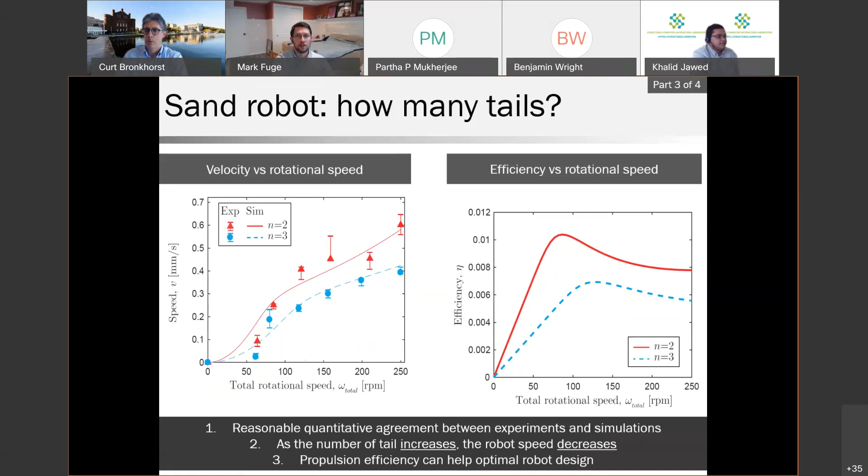I can also plot the efficiency, which is a ratio between the propulsive force divided by the input torque. Again, the 2 tails case is performing better in this specific setup. So as you increase the number of tails, the robot speed decreases, and propulsive efficiency is clearly a nonlinear function of number of tails, the length of the flagellum, its stiffness, and so on. It's a very highly nonlinear problem, and fast simulation tools can help in this case.

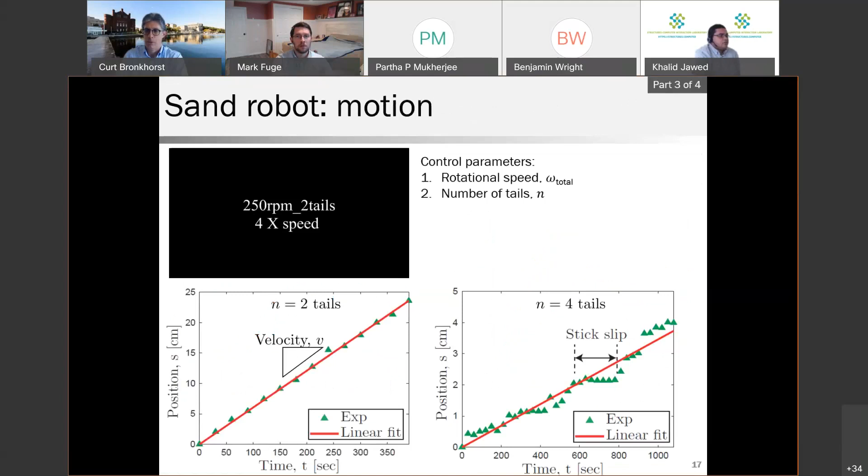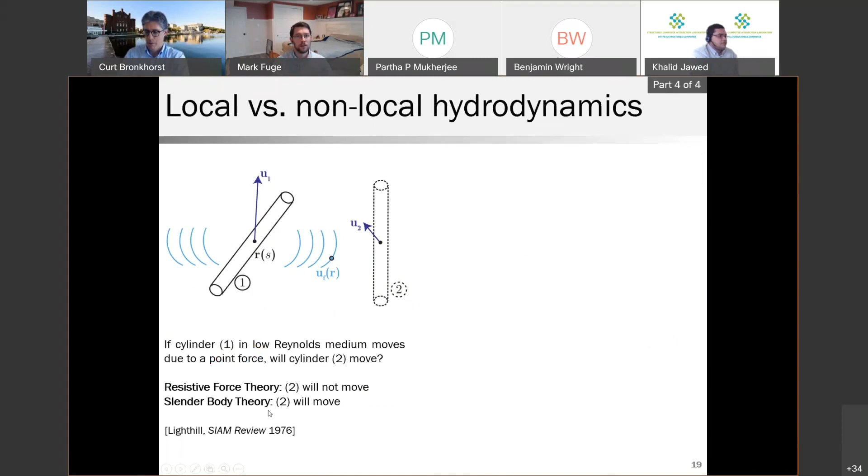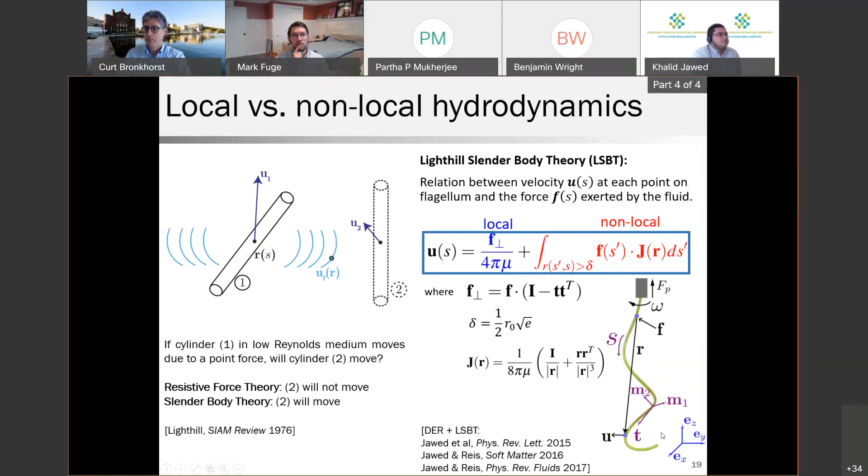In this example, we ran into an issue that with 4 tails or so, there could be long-range hydrodynamic interaction, so it doesn't really work well. An improvement over that is so-called non-local hydrodynamics, where we use slender body theory for simulation. Without going into the details of slender body theory due to Lighthill, the basic idea is this: the velocity on the left-hand side is an integral of the forces along the entire length of this tail. This formulation can account for the interaction between flows induced by different parts of the flagellum - that's why it's called a non-local theory.

Inspired by bacterium, we developed a simulation tool. This is the head, and it has a tail. We have the fluid and the structure, and a model of the head using a recent paper - I won't go into the details of this modeling part. When omega is small, so when the rotation of this helical flagellum is small - and all of this is in simulation, we haven't built the robot yet - it moves along a straight path.

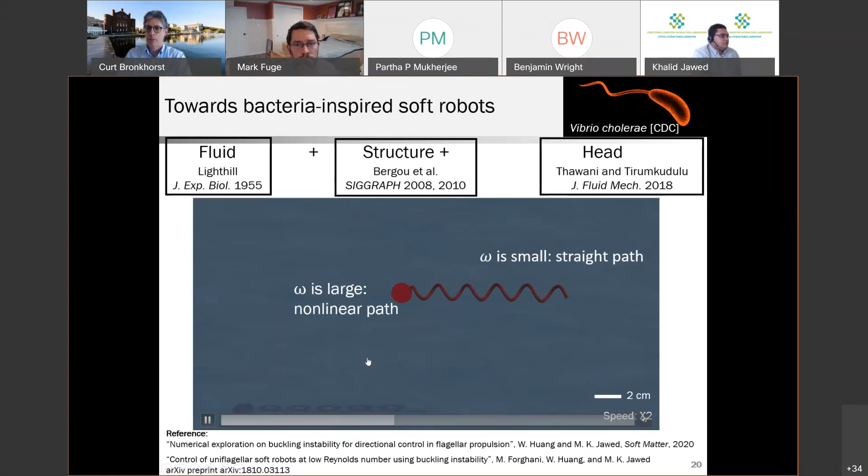But if omega is large, as you will see, there's excessive hydrodynamic force, and that causes the flagellum to undergo buckling and instability. Then the path becomes nonlinear. So the flagellum can buckle due to excessive hydrodynamic force.

In this case, we assume low Reynolds number. This type of bacteria-inspired robot could potentially find application at micro scale, such as drug delivery and so on. The other thing is it only has one control input - omega is the single control input. Depending on omega, sometimes it will go straight, sometimes it will go along a curved direction.

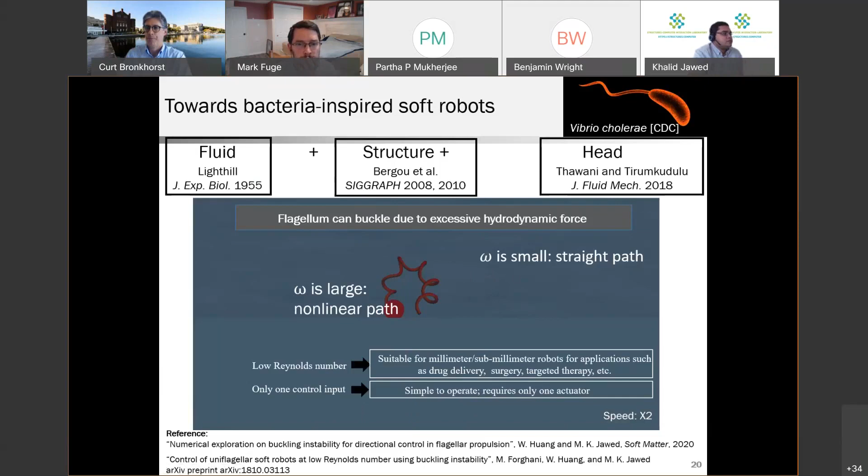Now, the interesting problem is the inverse problem: if I want the robot to follow a certain path, what should I do? How should I go about that?

To do that, let's quantify the motion again. I'm plotting the length ratio - we define the length as the distance between the head and the tip of the tail, normalized by the initial length, and plot that as a function of angular velocity. Before a threshold angular velocity omega b, this length ratio is close to 1, so the shape is helical, and then it gets buckled and takes a highly deformed shape. So there is a critical buckling velocity above which buckling will happen.

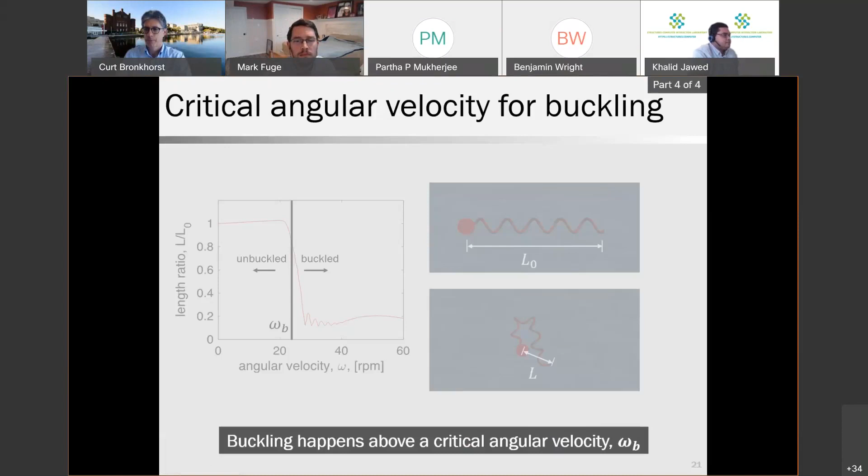We use this idea along with some data-driven techniques. You can use simple neural networks, and I will show citation of our paper later on. You can use that to essentially come up with the control signal omega as a function of time so that the robot will follow a prescribed trajectory.

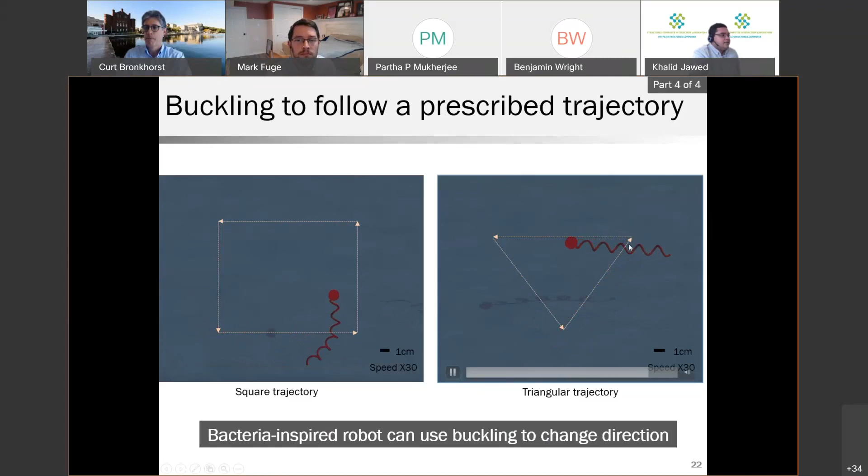On the left-hand side, the robot is moving along a square trajectory in 2 dimensions - a planar square trajectory. And then it is moving along a triangular trajectory.